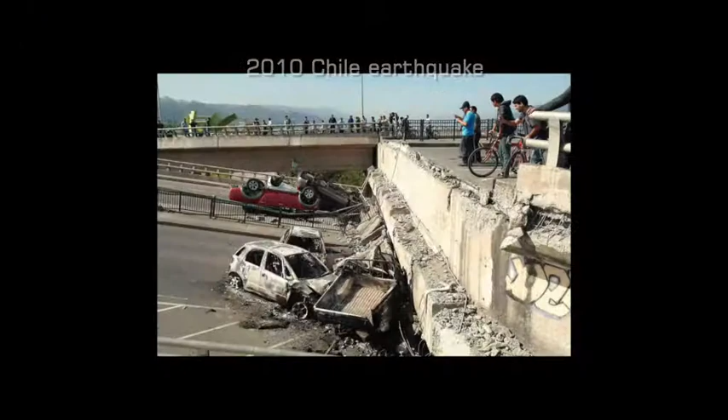Earthquakes are the largest potential sources of casualties for inhabited areas, leaving cities in disaster and killing tens to hundreds of thousands of people. Damage to structures not only causes loss of human lives and disruption of lifelines, but also long-term impact on the local, regional, and sometimes national and international economies.

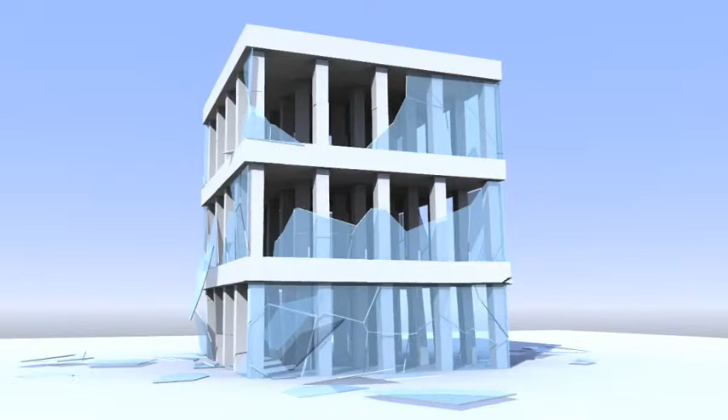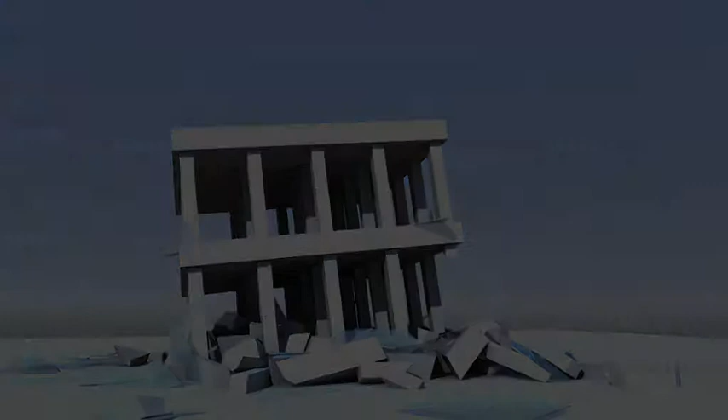The reliable prediction of nonlinear structural behaviour and the failure mechanism during severe seismic events has proven to be an extremely difficult task. Experimental research is therefore critical towards better understanding and predicting the seismic response of structural components. There are several different experimental techniques that can be used to test the response of structures to verify their seismic performance. One of these is the use of an earthquake shake table, where structures are excited in such a way that they are subjected to conditions representative of true earthquake ground motions.

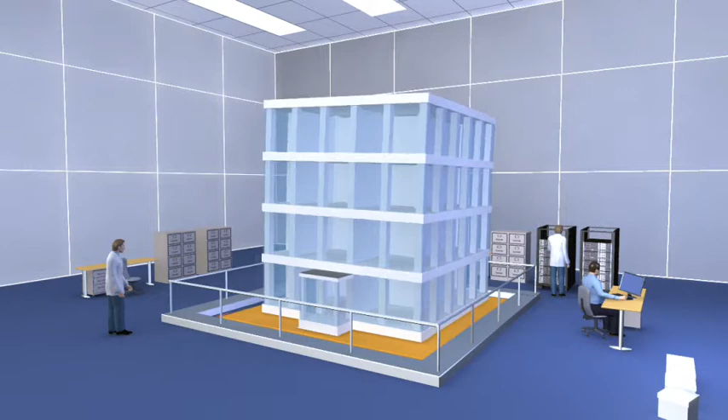However, due to the expensive costs, complexity, damage to the equipment, and the limitations on the size and capacity of these earthquake simulators, structures are typically tested on a reduced scale or a highly simplified model is used. The scaled and simplified model does not necessarily represent the response of the full-scale structure, which questions the validity of the shake table tests. Hybrid simulation, which is also called the pseudodynamic test method, is an attractive alternative for shake table tests.

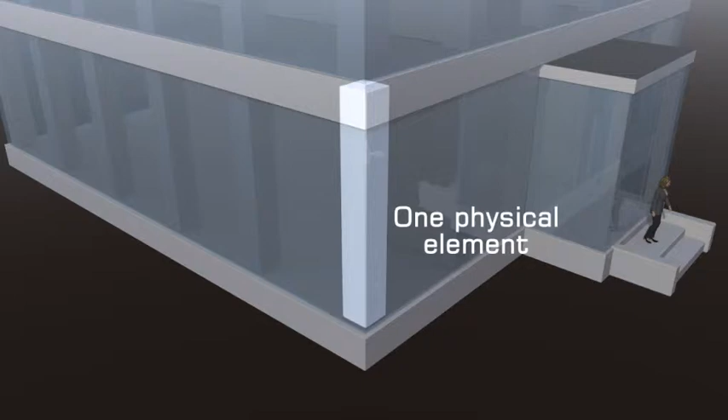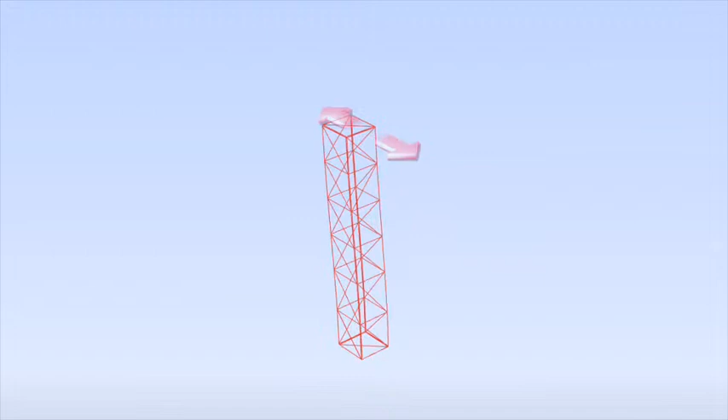Hybrid simulation is a hybrid procedure that combines classical experimental techniques with online computer simulation for cost-effective large-scale testing of structures under simulated dynamic earthquake loads. Hybrid simulation facilitates the study of structural response by experimentally testing only the critical portion of the structure, while the rest of the structure is modelled numerically in the computer. At each step of the analysis, the governing equation of motion is solved, similar to pure numerical simulations using a time-stepping integration.

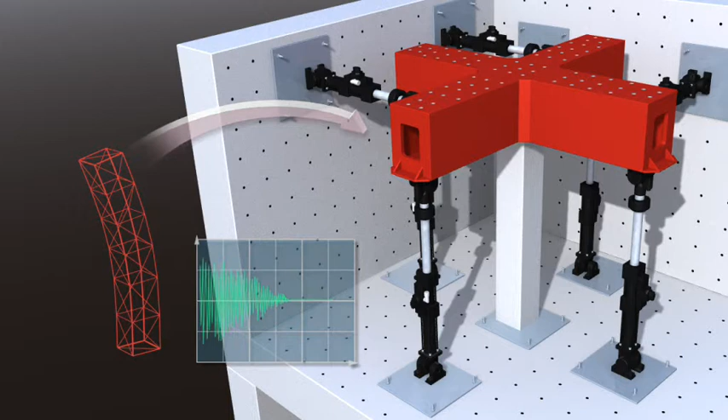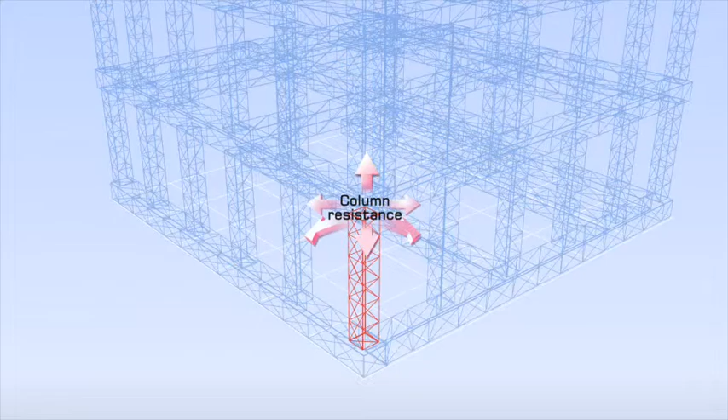The calculated displacement demands are then sent to the lab and applied to the physical specimen using computer-controlled actuators, while the numerical portion is analysed on the computer. The resisting forces, including shear, axial and moment reactions, are measured and fed back to the computation solver to calculate the displacements corresponding to the next time step. This process is repeated until the ground motion is concluded.

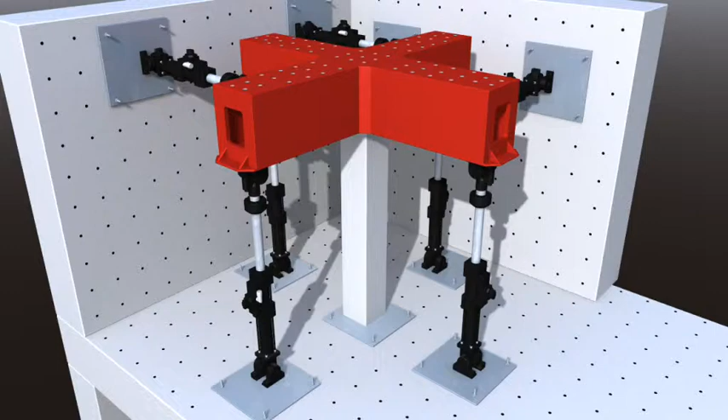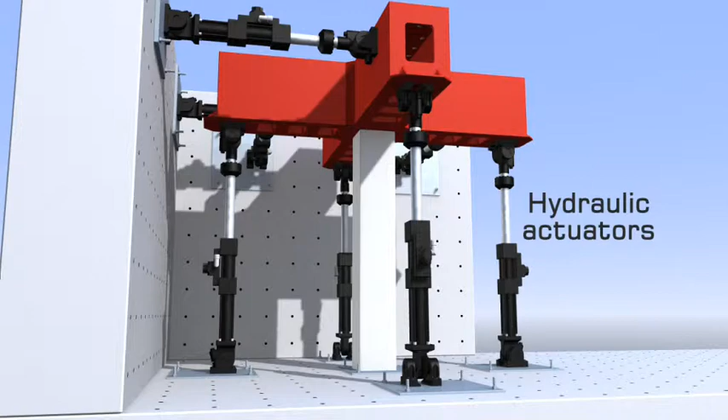Multi-axis substructure testing in the Smart Structures Laboratory at Swinburne provides a powerful tool for investigating the effects of earthquakes, hurricanes and other extreme events on large structural components using hybrid simulation testing. A sophisticated 6 degrees of freedom control system is used, utilising 8 high-capacity hydraulic actuators that enables application of complex multi-directional deformation or loading schemes to structural components.

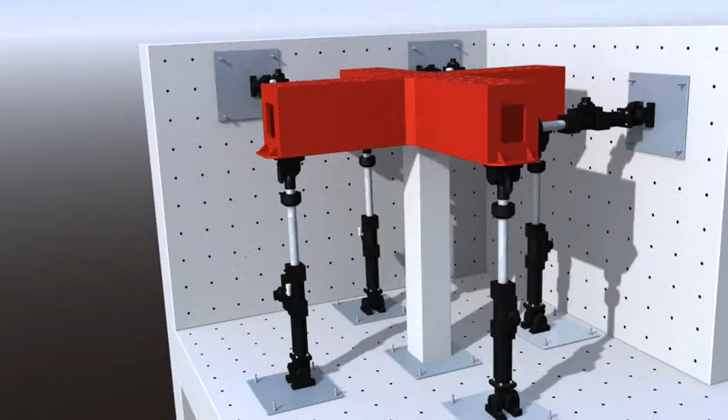In addition, a rigid steel crosshead is used to apply triaxial control, yaw, pitch and roll, to the test structures and also to apply planar translations to planar substructures. The system features mixed mode control, allowing users to specify the position or force required for the desired direction of loading to test large-scale structural components, including portions of beam column frame systems, walls, tanks and bridge piers.

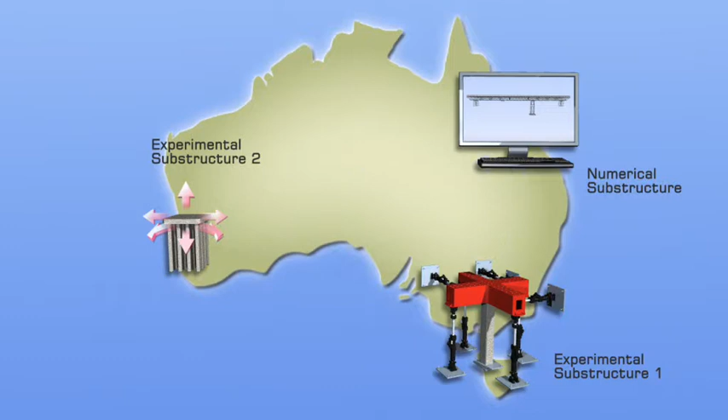The popularity of hybrid simulation amongst structural engineering researchers has grown to a great extent. Geographically distributed testing is one recent concept that has been developed from the use of substructuring techniques and benefited from technological advances in data transfer and computing. The concept of geographically distributed testing is that individual substructures do not need to be within the same facility, but can be linked by either the internet or other methods of data transfer. Therefore, laboratories with much larger capacities can be used for experimental subassemblies.

In terms of the numerical portion of the hybrid simulation, there are also benefits in allowing for the use of more powerful computers or even supercomputing facilities to run the hybrid simulation test, since the computers running the analysis do not need to be in the same laboratory.

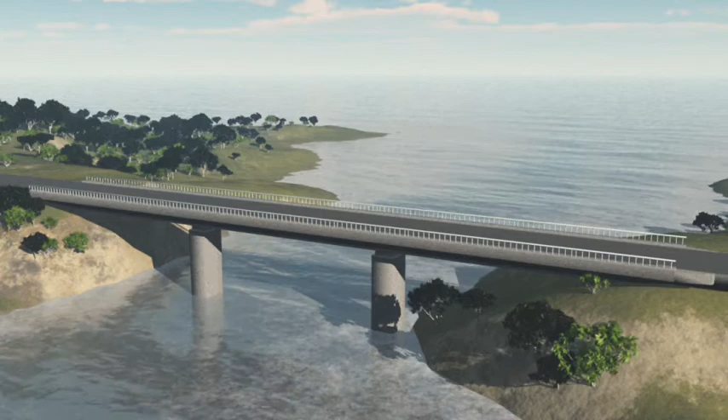The multi-axis substructure testing system in the Smart Structures Laboratory provides a powerful and cost-effective tool to investigate the dynamic effects of extreme loading events on large-scale structural systems through local or distributed hybrid simulation testing.